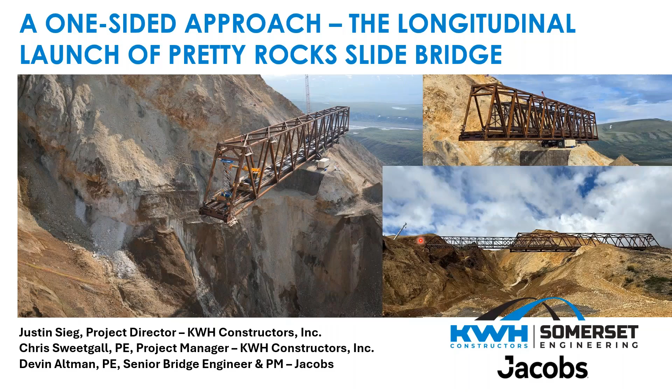What you're seeing right now on the title screen, the far left photo shows the completed permanent bridge in the balanced cantilever state. Notice the large 130 kip crane at the end of the cantilever and the scissor lift. We also built a bridge within a bridge for this project, so you can see the launching nose nested inside the permanent structure. And on the bottom right, you'll see the launching nose extended across the landslide, resting on the receiving tower prior to the combined truss launch.

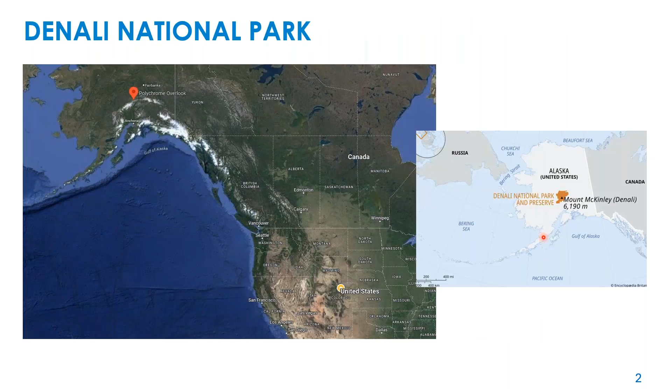For this project, we are in Alaska, the largest state in the United States, and we are in the third largest national park in the United States, Denali National Park, in the south central portion of the state. This is one of the main reasons folks come from near and far to visit the national park.

It's the beautiful scenery, it's the tallest mountain in North America, some beautiful natural wonders. I encourage everyone to join us at the park at some point if you've never been, or if it's been a few years since you've been there.

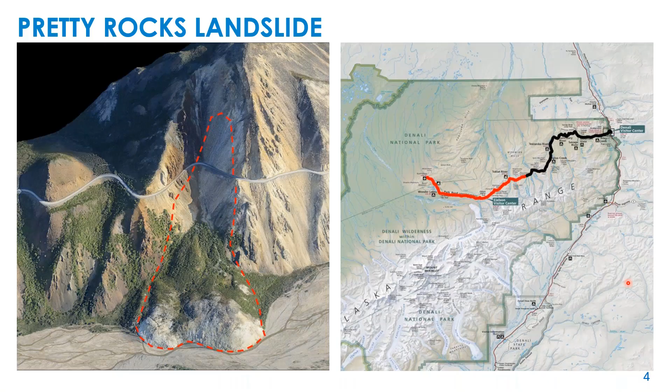The Denali Park Road is the only road in the park, so it is where a lot of the adventures begin and hikes and expeditions go from. So it's a big need to bring it back into access and accessibility to the western part of the park.

As I mentioned, half that park is closed due to the landslide taking out the road, and that has led to the consequence of more than $1 billion per year in revenue loss from the Alaska local economy. That is trickle-down economics, where more than 600,000 tourists each year come to the park from all over the world.

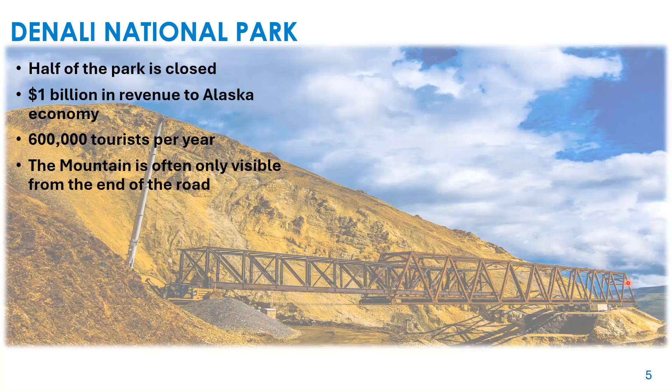The mountain is often only visible from the end of the park road, so this is another need to get it back up and running so people can get there.

Showing a little bit of the history of the slide movement over the years, we have ice-rich soils here with permafrost that some of the increased temperatures have been melting, leading to some instabilities for the landslide movement to progress. Starting in the early 1980s, it only needed a little bit of maintenance here and there every couple of years. By the end of the 1980s, we then progressed into needing annual maintenance to service the road.

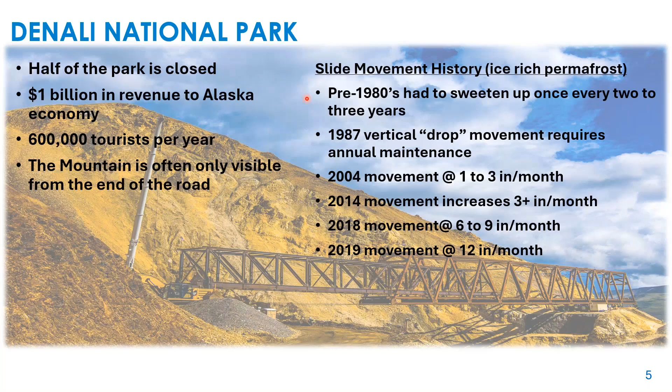In the early 2000s, we're talking about inches per month. As we progress towards the end of the 2010s, we get to feet per month, and finally 5 feet per month, when the Park Road was closed and no longer allowed to be serviced at the end of the 2021 season.

The first construction season was that summer. It is a very shortened construction season with only really 5 months we can count on for construction. So there are 4 seasons planned of work, 3 have been completed, and we'll go into more detail, but the project is scheduled to be completed here at the end of this summer, in 2026.

Due to the site constraints and trying to span the landslide, what we ended up with was a 475 feet steel Warren truss. It helped fit the site really well to span the gap and go over the landslide. It also helped that the park road itself is quite narrow, and we only have an 18-foot wide roadway.

With the 475 feet, we have about 10 panels, each one about 47.5 feet long, which led to easily shippable pieces, nothing longer than 50 feet, so everything can get to the remote site easily. We ended up with a Warren truss after looking at a couple different options, but because we have a lot of different configurations and stress reversals, with different diagonals going into tension or compression, it set up nicely and gave us the right combination of stiffness we were looking for.

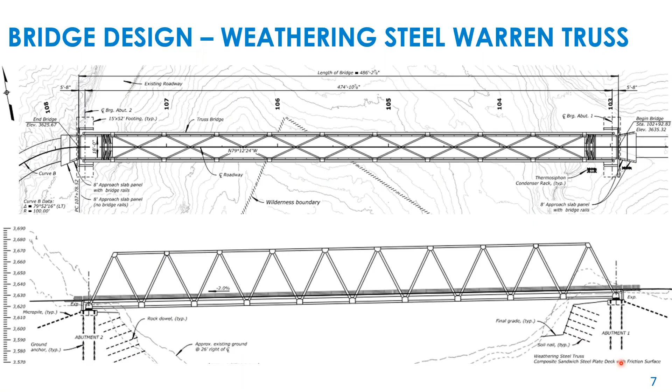We wanted to keep things rather simple, so all of the chord members are box shapes, and the end posts as well. All the diagonals, except for the end posts, are H shapes. The most complicated shape is probably this 5-sided top portal strut. We also had built-up I sections for the floor beams and rolled flange beams for the stringers and top and bottom lateral bracing.

We also have a lightweight sandwich plate system, SPS deck system, which has 2 thin plates of steel and a polyurethane core that helped us save on weight for the structure.

One of the other unique aspects to the construction is the fasteners being used. These are new in the AASHTO LRFD Bridge Design Specifications 10th edition, and they weren't in AASHTO at the time we designed them, but it's the TNA torque and angle Grade 144 fasteners. They're able to be tightened from just one side. This spline is fixed and doesn't come off like a TC twist-off bolt.

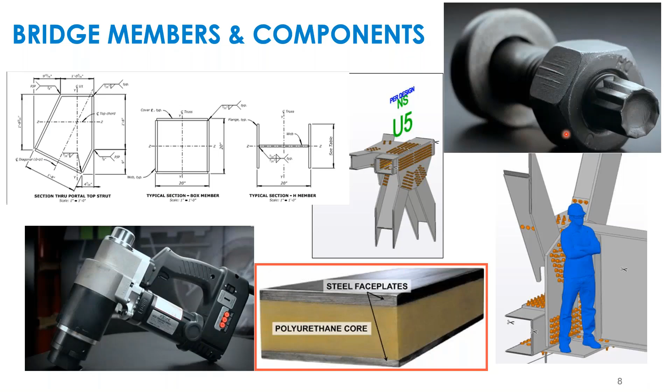This gun has a dual socket. The inner socket grabs the spline, the outer socket grabs the nut, and is able to tighten the bolt from one side. All of the fasteners were exterior facing for constructability.

I mentioned some of the geometry already. The out-to-out width is about almost 26 feet. The client for this project is Western Federal Lands, the Highway Division of FHWA. The owner of the bridge is the National Park Service. Prime consultant was Jacobs, and BGC Engineering was the geotechnical subconsultant for the project.

Over here you can see a typical section. You can see the floor beam, the stringers, the SPS deck, along with the guardrails on the outside and the narrow roadway width. I'll point out, if anyone has an 18-foot roadway in the future, the MBE manual makes you load rate for 2 lanes, but you only design for the bridge design specifications for 1 lane.

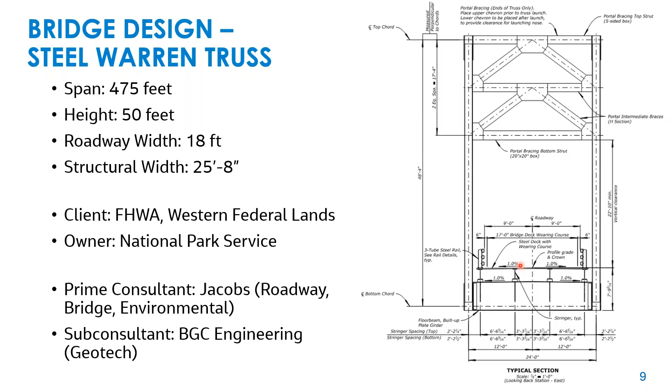For this CMGC delivery method, I really want to commend our client, the U.S. Department of Transportation, for fostering innovation and collaboration very early on in 2023 that allowed KWH, Jacobs, Granite, and FHWA to work together early in the process to design for constructability and erection means and methods, to get going on a BIM for bridges model and get the lead time going for steel to reestablish the road as soon as possible.

And with that, I'll go ahead and pass it over to Justin.

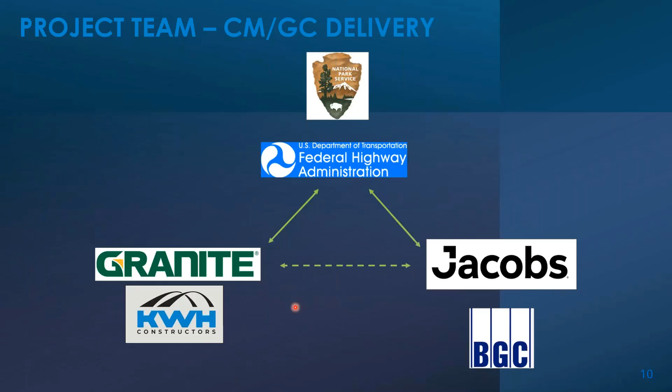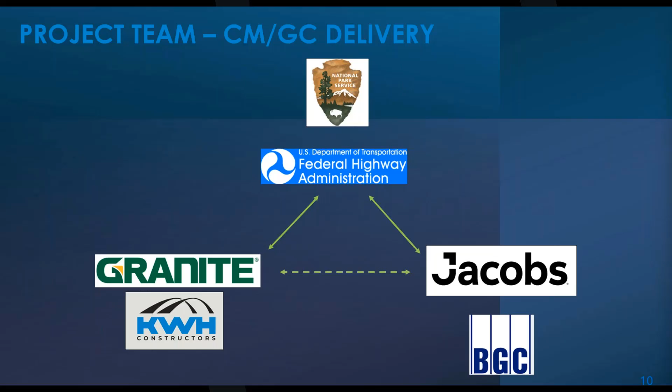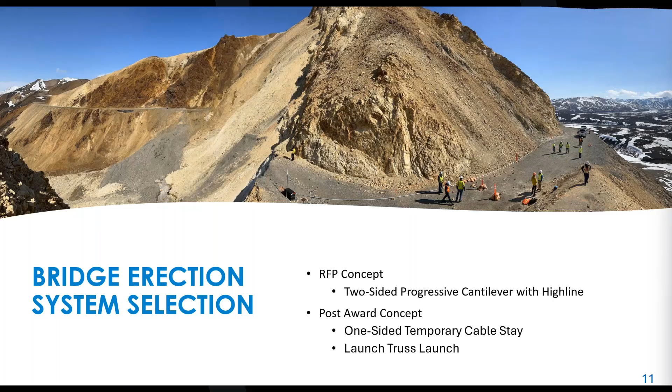As Devin said, the CMGC process was utilized, and we were able to be brought on board early, KWH constructors along with Somerset Engineering, during the pre-construction phase. The first task we had was to select the bridge erection system. It needed to be selected first because this complex erection would control the final design of the permanent structure as well. At RFP time, there was a 2-sided progressive cantilever approach with highline to transport material across the slide. Post-award, 2 other options were considered: a 1-sided temporary cable stay and a launch truss launch methodology.

The RFP concept, progressive cantilever from each side utilizing a highline, had some challenges. There was a lack of geotechnical information at highline stay locations and stay foundation locations. When we did receive additional geotechnical information, the data showed unfavorable conditions behind the west abutment, showing ice-rich colluvium behind that abutment, which was unsuitable.

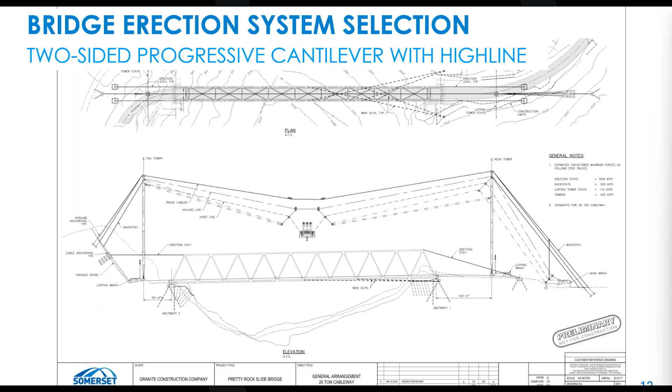There was an issue with the feasibility of the wind guys due to the magnitude of the wind in securing them, and it was difficult to mobilize a large enough crane to erect the highline towers.

The second concept of the one-sided temporary cable stay approach was good in that we're directly erecting the bridge like the previous, and it did not rely on temporary foundations on the west side. It still had the issue of the feasibility of wind guys due to the magnitude of the wind, and the duration of exposure to wind was high throughout the erection process.

The exposure, or the area of the structure, got worse and the magnitudes of the loads got worse. And there's unpredictable wind conditions at this site.

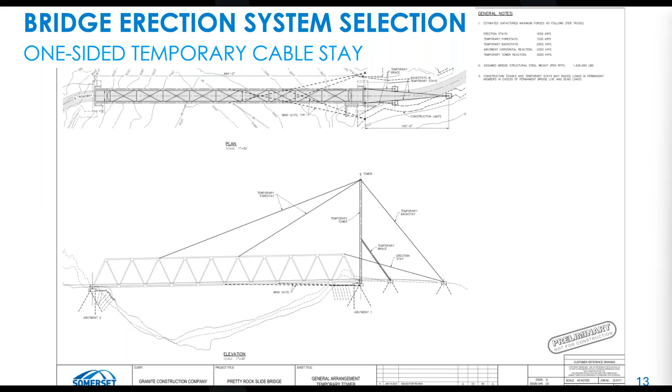The last considered was the bridge erection system of the launch truss launch. This did not rely on temporary foundations on the west side either. It had the best ability to resist wind loads due to the bridge being erected at the central line of abutment 1 and utilizing 3 bays of the bridge to resist that wind load.

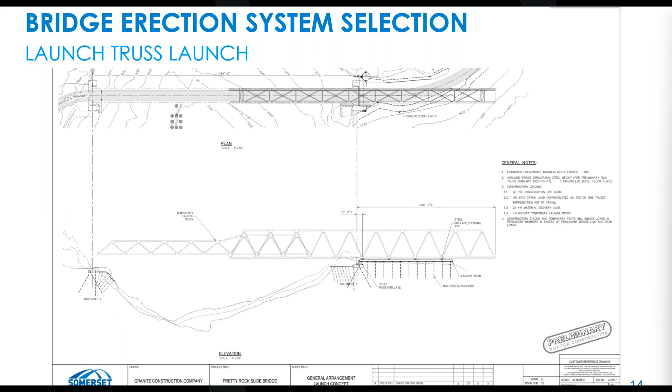We could build the entire truss and build the launch truss inside the truss, and choose when to perform that launch truss launch and each of the combined truss launch activities, where we had stopping points to wait for a weather window. Ultimately, the launch truss launch methodology was selected as the wind exposure periods were less, and it didn't rely on temporary foundations on the west side or access across the unpredictable landslide.

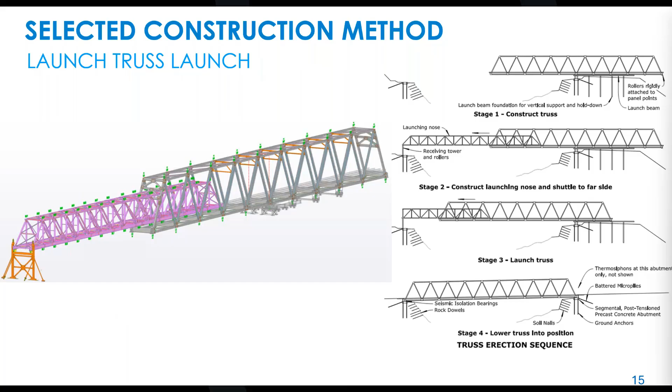When the bridge erection system was selected, the next step was to progress to the design of the permanent structure and the bridge erection system. The CMGC contracting method allowed for constructability during the design phase of the permanent structure because of the ability to perform a parallel design of the bridge erection system and the permanent bridge.

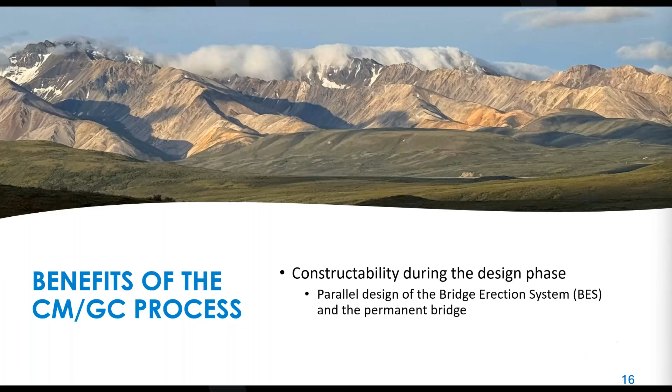The erection engineer was able to work closely with the bridge engineer to consider all load cases during construction, many of which are controlling loads due to the complex erection method required. We knew the permanent structure would withstand the forces imposed during erection because of this intimate coordination between the erection engineer and the design engineer.

Once we were able to develop those loads and start to have confidence in the member sections of the permanent bridge, we introduced the IDD, or Integrated Design and Detailing process, for the main bridge. We were able to work collaboratively and implement this process. We brought on DBM Vircon as the detailer to begin building a model that would ultimately be used for fabricating the permanent bridge.

That's a large difference and is not done very often at this stage, but we were actually creating the model with enough accuracy to fabricate the bridge from. We started the process by creating a 3D wireframe to agree on the geometry. We then infilled main member cross sections. Once that was decided by the design team, we were then able to produce an advanced bill of materials, or ABM, for solicitation of the main member plate.

We were able to award the mill order to a fabricator, and that duration of the mill order, approximately 6 months, was able to happen at the same time that we were completing the connection design and the final design of the bridge. It also allows for accelerated connection design.

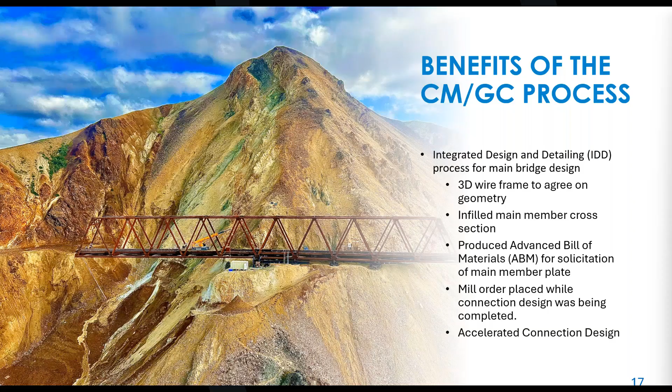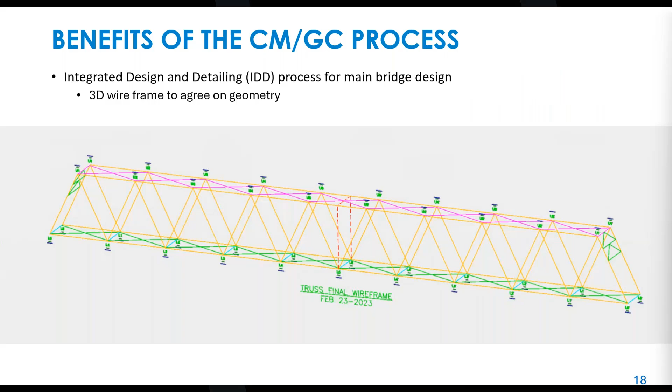So I'll show you each of these steps. The 3D wireframe is what I'm showing here. This is the first step: create a general geometry and also camber. We were able to have this model approved as the basis.

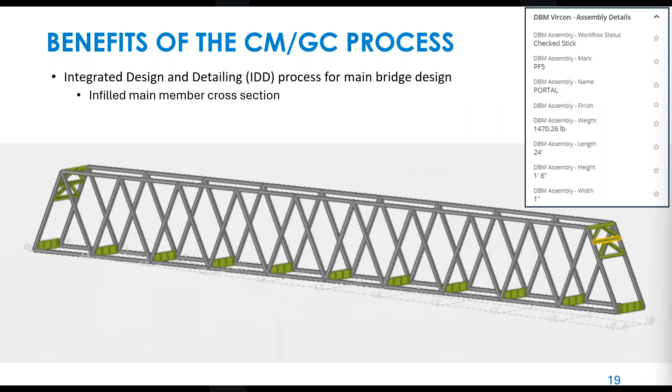Once we had that solidified and approved, we were able to produce this advanced bill of materials and make it easy to get accurate pricing from a fabricator, and then move into the award and procurement of this material. I just wanted to note that some people may think it's odd to have the fabricator on at this time.

This was a fast track project with a goal to open the park road as soon as possible.

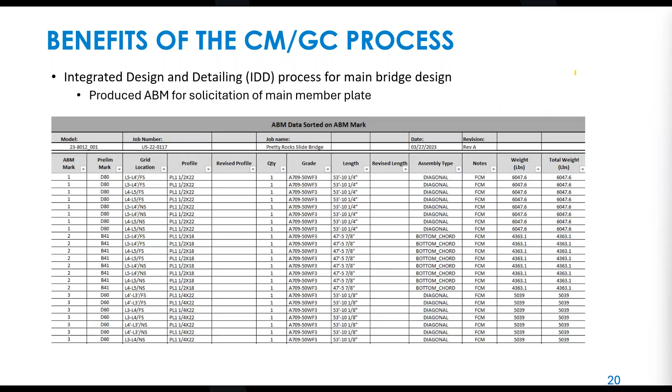It's interesting that the fabricator that procured the primary plate did not end up being the fabricator that fabricated the bridge. So you're not necessarily stuck at this phase with an initial fabricator.

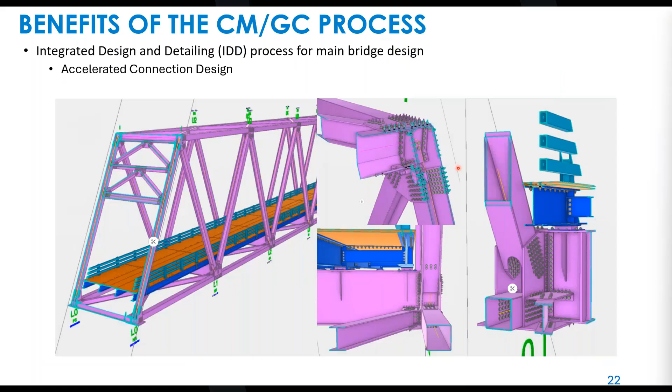Another benefit of the CMGC process was the ability to have the temporary foundations designer on board during the pre-construction phase. This is a very unique geological site that varies wildly. We had very little geotechnical information in the area where we needed temporary foundations. We completed the preliminary design during pre-construction.

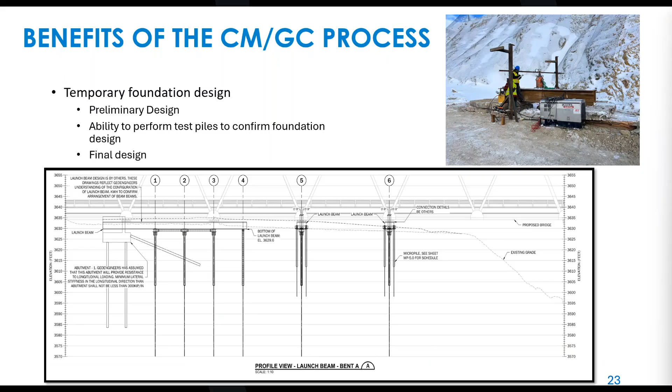These are all examples of benefits of the CMGC process, but it's not meant to be an all-encompassing list, as there are many more benefits. These were just focused on the design phase of the project.

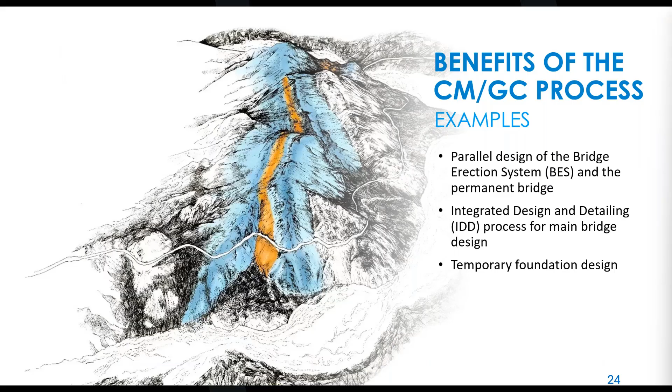Now that we have the background of the project and have gone through the design phase of the permanent bridge, Chris will begin to look at the installation sequence and the details of the design of the bridge erection system.

Thanks, Justin. So the first step in the installation process was to install the foundations in the launch bed, as Justin described, and then to assemble the main truss on top of them.

The first four bays of the truss were erected using a land-based crawler crane, left over winter between the first and second construction seasons. At the start of the second season, a small telescopic crawler crane was placed inside the truss and used to erect the remainder of the truss in a balanced cantilever progression, as seen here.

The next step was to construct the launch truss within the main truss. The launch truss was progressively assembled on rollers one bay at a time, and each bay was shuttled forward until the truss was fully installed within the main truss.

The launch truss was then launched to the receiving tower. Using the jacks on the receiving tower, the tip of the launch truss was raised about 7 feet to counteract rotation and deflection, providing level support for the combined launch.

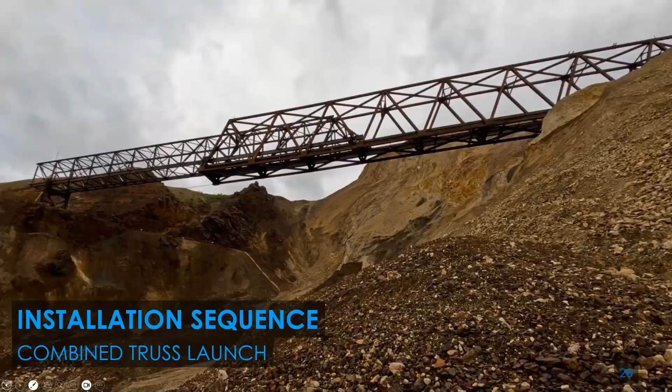The combined truss was then pulled across the slide using strand jacks located on the receiving tower. Once the combined truss was across the slide, the jacks in the receiving tower were used to lower the west end of the bridge to its final elevation.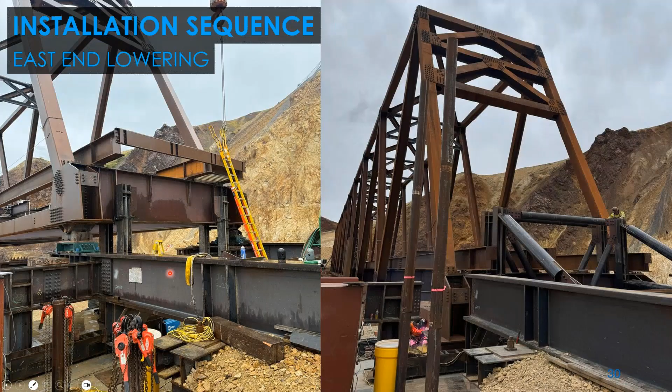Next, on the east end of the bridge, a jacking frame was constructed within the launch bed and used to lower that end to its final elevation. The final step was installing the SPS decking plates and bolting them to the stringers.

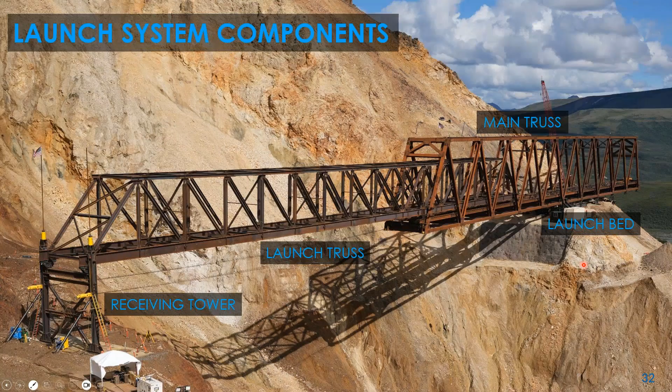So a quick recap of the launch system components: we have the launch bed, the main truss, the launch truss, and the receiving tower. The launch bed was used to support the main truss during erection, including over the winter, and then again during the cantilever phase of the launch truss launch.

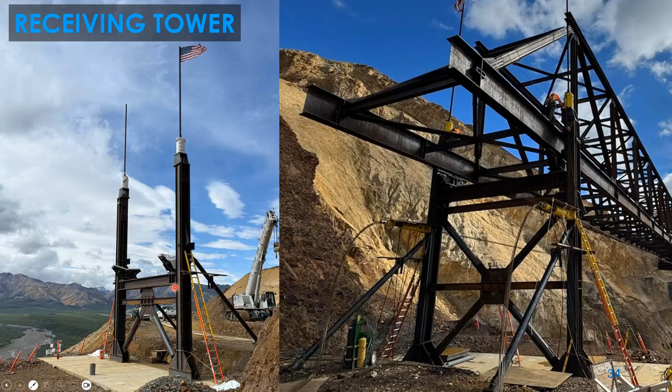It then provided a launch track for the combined truss during the combined launch, and was built out of W36 by 529 launch beams, as well as C15 channel tie-downs and HP16 by 121 outriggers to support the truss under winter loading conditions. The receiving tower was intended to provide variable elevation support for the launch truss and the combined truss.

It consisted of HP 18 by 204 columns reinforced with double C15 by 50 channels. These were the largest sections available to us at the time. Due to time constraints, there wasn't time to fabricate a custom section. We had to get the pieces across the slide before access was lost.

At the top, we had 400-ton center hole jacks with 3-inch diameter bar, which was the largest high-strength bar commercially available. We had double 200-ton rollers to support the launch nose and 70-ton strand jacks to pull the combined truss across. The main truss was designed by Jacobs Engineering, and it was 475 feet long, by about 25 feet wide and 50 feet tall, 24 feet wide.

It weighed 1.6 million pounds, and was split into 10 bays. It consisted of built-up box and H sections, rolled W shapes, and built-up crowned floor beams. There were 24,000 1-inch diameter TNA bolts in the structure.

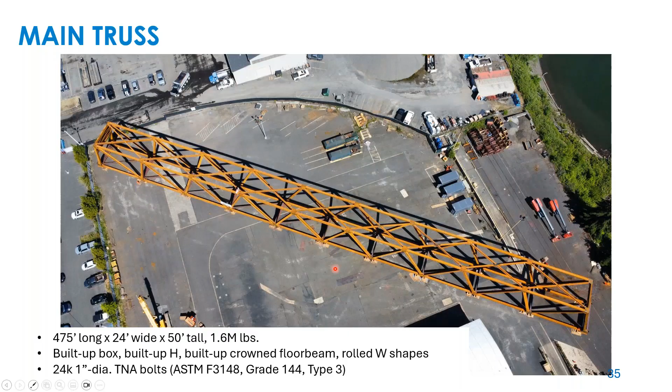The launch truss had to span the 237-foot gap between the main truss and the receiving tower, and it was 392 feet long, 20 feet wide, 25 feet tall, and weighed about 636,000 pounds.

We used almost all types of steel generally available to construct the launch truss. There was 100 KSI connection plate, 70 KSI plate, 50 KSI plate, plus rolled channels, I-beams, and angles. It used 9.3 thousand 1-inch diameter bolts.

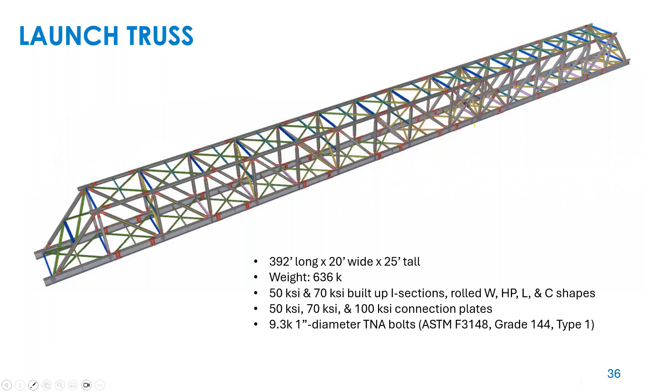Now Justin's going to talk through the interfaces between the various launch system components. The first interface to look at is between the launch bed and the main truss. The main truss needs to be statically supported during main truss erection and the launch of the launch truss, but during the combined truss launch, it needs to allow movement.

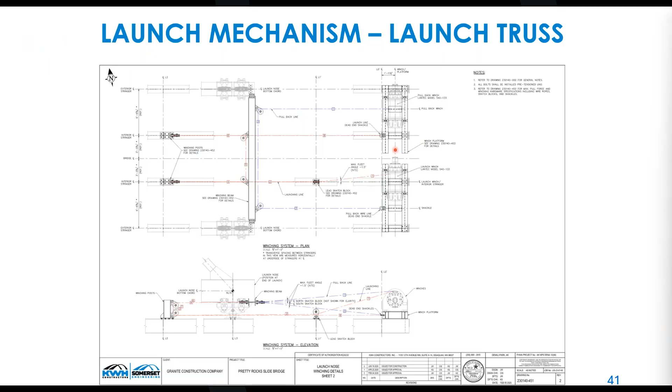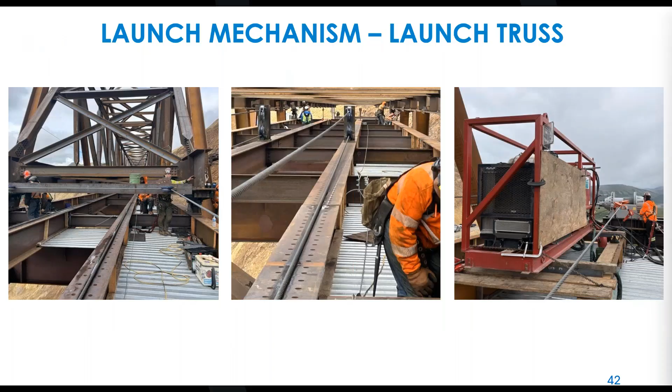It went back, connected to that winching beam I showed at the end of the launch truss, through here, all the way back to the winching post, down, and back to the structure. This is what it looks like installed. This was the hydraulic winch, which gave us a lot of control during the launch. It went out of here, down to the winching post, back up into the winching beam, over, and then dead-ending back at the frame. The last mechanism for movement was for the combined truss launch.

We mounted strand jacks, provided by Enerpac, to the west face of the receiving tower columns. We ran strand from there to the L0 node of the permanent structure. This method was selected because it provided controlled movements and directed the bridge to where it was supposed to go, lessening the guiding forces required.

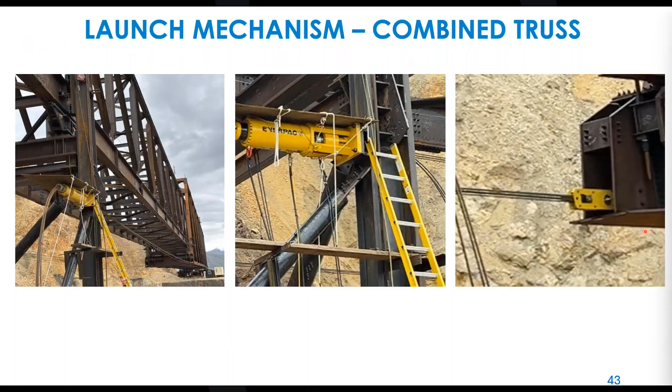Thanks, Justin. So this being an FHWA bridge project, we used AASHTO codes for the design. The main reference used was the LRFD 9th edition, which was in effect at the start of the project. The 10th edition was released toward the end of the design phase, and there were certain specific refinements used in our design in a limited capacity.

Since the bridge erection system was mostly temporary components, the guide design specs for bridge temporary works were applicable, and it was also necessary for us to reference ASCE 7 for load development.

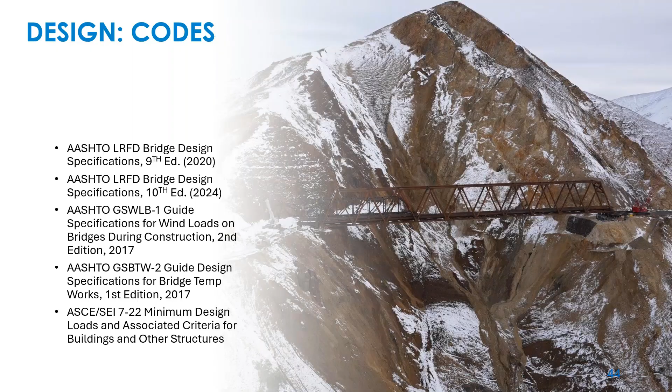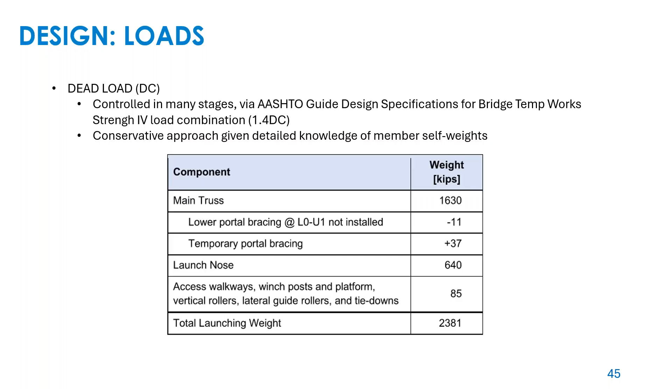And I'll go briefly through some of the loads taken into account in the design. Dead load controlled in many stages, especially for low wind stages, and we used a load factor of 1.4 throughout, which is arguably conservative given the level of certainty of the member self-weights.

Wind loads were based on a climatology study and wind tunnel testing done by RWDI. You can see here their scale model in the wind tunnel. Wind was key for many of the launch stages, so we monitored wind speeds throughout construction using weather stations with satellite uplinks. We planned our launch operations based on customized local forecasting given to us by RWDI.

The wind speeds we considered were 110 miles an hour for components left over the winter, 85 miles an hour for most components when not under active launch conditions, and 30 miles per hour for active launch stages.

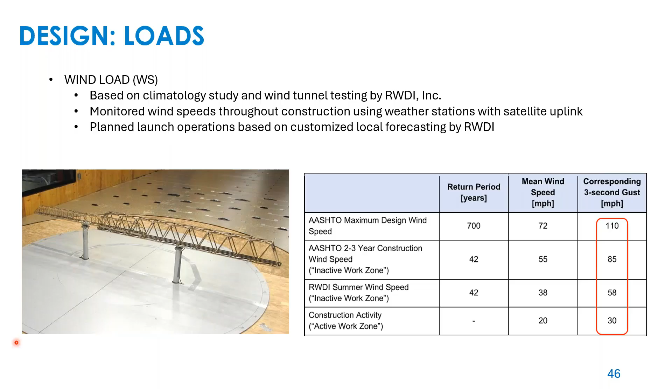The live loads we considered were mainly the crane, but we also had scissor lifts and personnel and construction materials on the deck. As you can see here, there were 19 different crane positions modeled in our design.

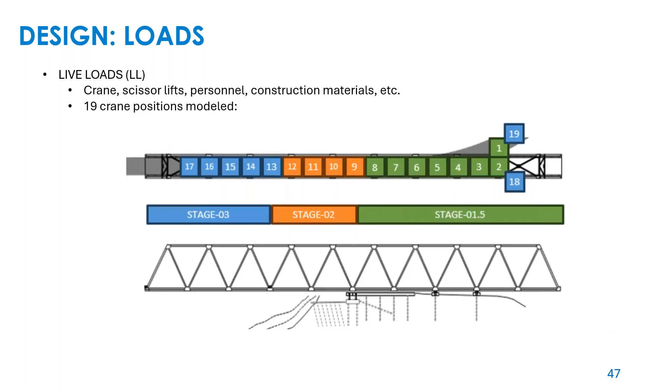This being Alaska, it was necessary to account for snow and ice, especially during the winter months, and the forces were not insignificant. Ice load ended up being about 20% of the dead load, snow about 30% of the dead load, and wind on the ice was about 30% of the wind load.

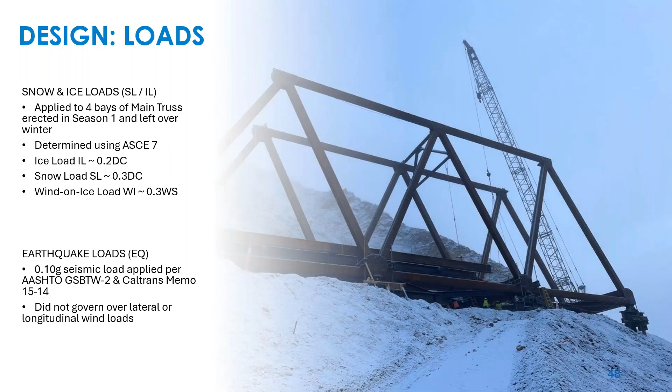We prepared a global model using CSiBridge and used it for the entirety of the design. The erection of the main truss was modeled as a piece-by-piece staged installation, and the launch was modeled as 12 full launch stages, which were split into 73 substages.

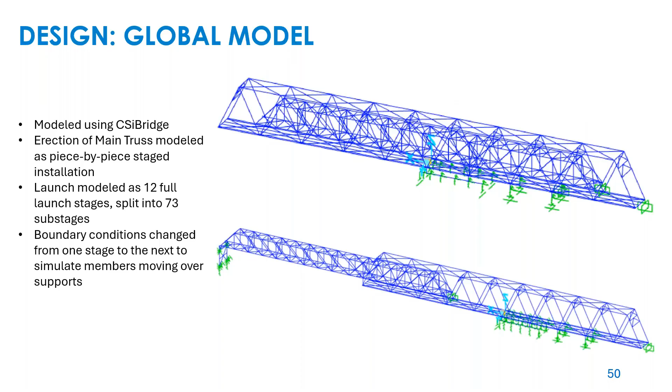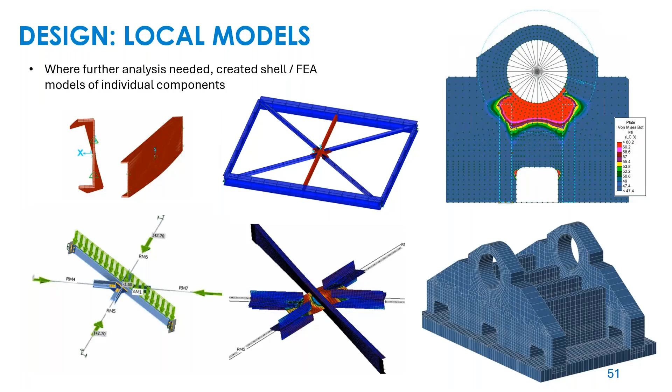In the launch model, the boundary conditions changed from one stage to the next to simulate members moving over supports. While that gave us the bulk of our design forces, it was necessary to develop local models for specific components, such as roller frames and rockers, where bridge codes aren't really rigorous.

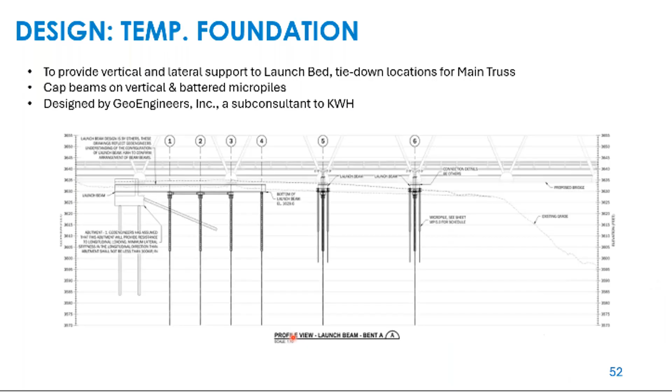The temporary foundations were designed by Geoengineers Incorporated, a subconsultant to KWH, and they were intended to provide vertical and lateral support to the launch bed and to give tie-down locations for the main truss. They used cap beams on vertical and battered micropiles.

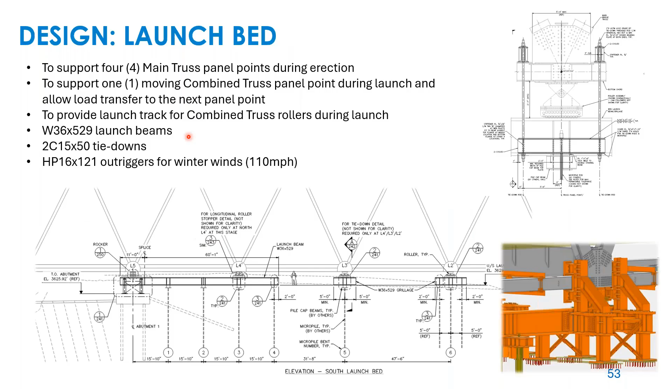The launch bed was intended to support 4 main truss panel points during erection and to support 1 moving combined truss panel point during launch, and to allow for load transfer from that panel point to the next panel point. It provided a launch track throughout that launch for the rollers to roll on. As mentioned earlier, we used W36 by 529 launch beams, which were basically the largest section available to us at the time, as well as a number of other components.

The receiving tower was intended to support the west end of the launch truss and the combined truss at varying elevations. It had to raise the tip of the launch truss about 7 feet for the combined launch, and then lower the truss about 14 feet to its final elevation.

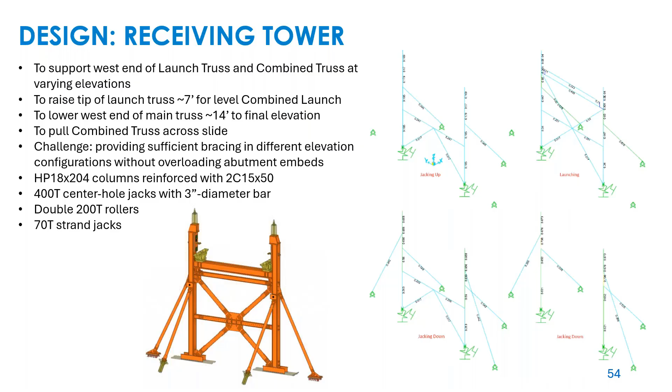It also had to support the strand jacks and their loads for pulling the combined truss across the slide. The challenge in designing the receiving tower was providing sufficient bracing in the various different elevation configurations without overloading the abutment embeds.

The launch truss was intended to extend the main truss for the combined launch. It had to be quickly dismantled at the end of each stage of the combined launch because there's a rock face on the opposite side of the receiving tower. So with every 1 bay of the main truss that was launched, 2 bays of the launch truss had to be dismantled.

It was subject to significant load reversals because it went from a cantilever support to a simply supported condition. And the bottom chord also had to resist combined compression and flexure while rolling over the receiving tower. This is where the 10th edition of the AASHTO was helpful in the analysis.

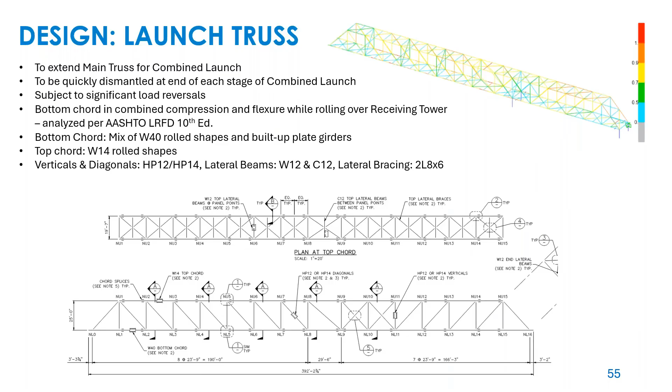That bottom chord was a mix of W40 rolled shapes and built-up plate girders. The top chord was W14s, and verticals and diagonals were a mix of various components.

The main truss was analyzed throughout the entirety of the erection process. First we built a piece-by-piece model simulating the actual erection of the truss itself, and then the staged model represented all stages of the launch. We checked all main truss members and connections at every stage, and there was no allowance for temporary overstress.

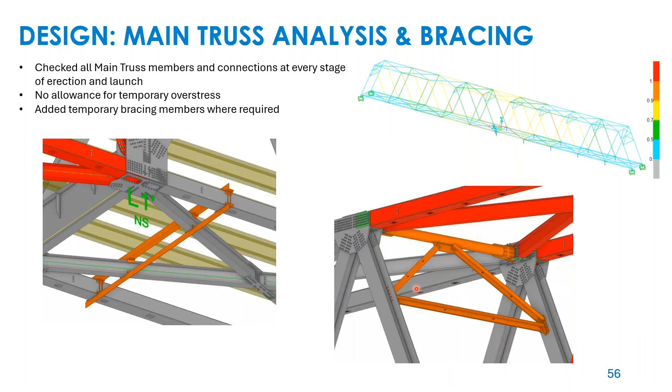In some locations, it was necessary to add temporary bracing members, as can be seen here: temporary portal bracing and temporary bracing of the permanent lateral bracing.

The east end lowering frame had to be constructed within the launch bed and provide vertical, lateral, and longitudinal support to the main truss throughout the lowering operation. We had to build it in the launch bed while removing the launch bed, so it posed significant challenges in its design and in its construction. But ultimately, it allowed us to lower the bridge about 9 feet in 9-inch cycles.

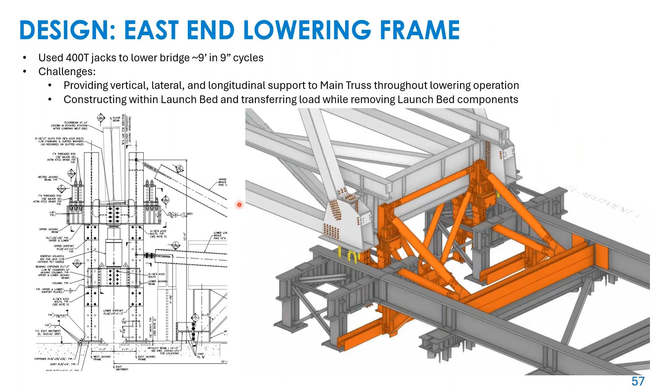I'll speak about some of the design challenges we faced. The tie downs between the launch truss and the main truss were certainly challenging. At L0, this tie down was a critical connection. It transferred all of the downward load during the cantilever launch truss launch, and then all the uplift load during the combined launch.

There was a need for redundancy without much available space or weight. It used 8 2¼-inch high strength bars connected to beams that were welded to the floor beam via 3-inch thick plates and stabilized using other plates bolted to existing stiffeners. There were very tight clearances there, so we had to specify the direction of installation for the permanent bolts so that there wouldn't be clashes.

At the L3 tie down, this is another critical connection. That had to support the downward force during the launch of the launch truss, which then became uplift force at the end of that launch, and then went back to being downward force during the combined launch.

Same as at L0, there's a need for redundancy without taking up much space or weight. We also needed to create an uplift connection between the stringers and the main truss structure because there was none in the permanent design. There's also a need for a longitudinal connection that would not be affected by all those load reversals and would not create a large force couple with the lateral wind load applied to the end of the launch truss.

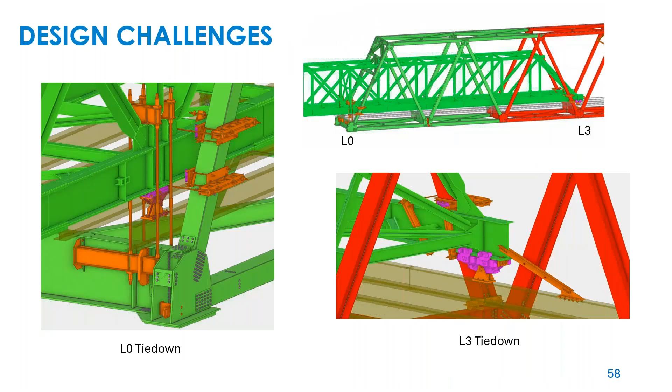So now Justin's going to talk through a few of the other design challenges that we faced. One major remaining issue is the interdependence of the main truss and the launch truss. They're integrated together. We completed the main truss design. It was 5% heavier than expected, but we didn't have time to optimize the main truss.

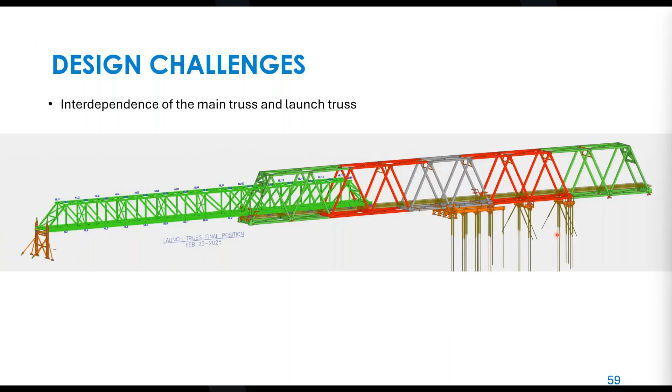It needed to go into fabrication so we could meet our season 2 goals. To optimize the launch, we reduced the launch truss's weight while maintaining its strength by using 100 KSI splice plates for anything that didn't need to be welded, 70 KSI knife plates, cutting out unused steel in the knife plates, and trimming the free leg of angle bracing to the extent possible.

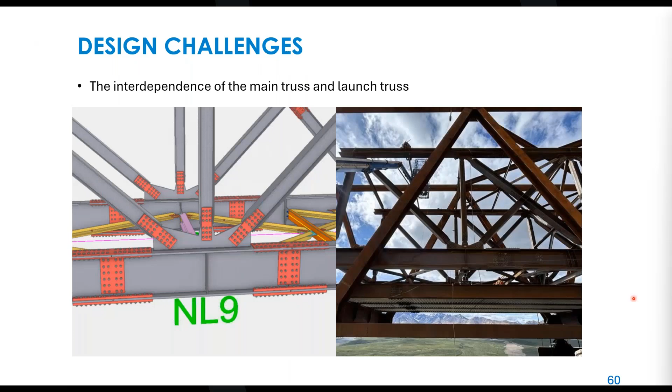This is a look at the knife plates and connection plates where we have cutouts. These were made thinner by using higher grade material, and the red pieces are the splice plates that were made out of 100 KSI steel. That's what it looked like in the field.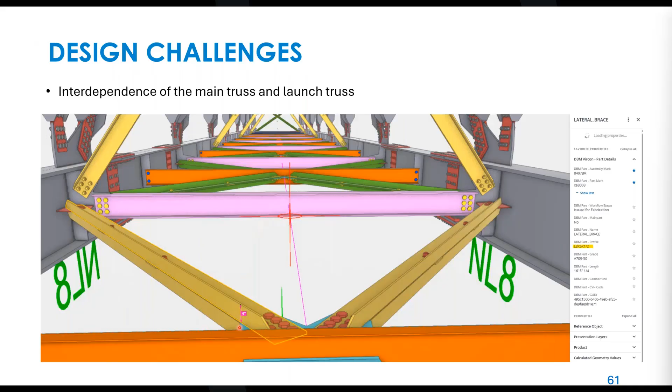This is an example. We had a lot of this double angle bracing. If you look in the model here, it was a standard shape, 8 by 6 by half inch. We trimmed the free angle leg to 4 inches because that's all that was required.

The last design challenge we'll speak of is just the temporary support of the main truss in the launch bed in its load path. We're supporting the main truss at the center, not at the ends of the bridge where it's meant to take a load like this. So there's a few things to consider.

This is a free body diagram of the first issue, which was pre-tensioning the tie-down rods and ensuring that the launch bed structure beneath and the permanent structure were not damaged. Secondly, was the actual load path.

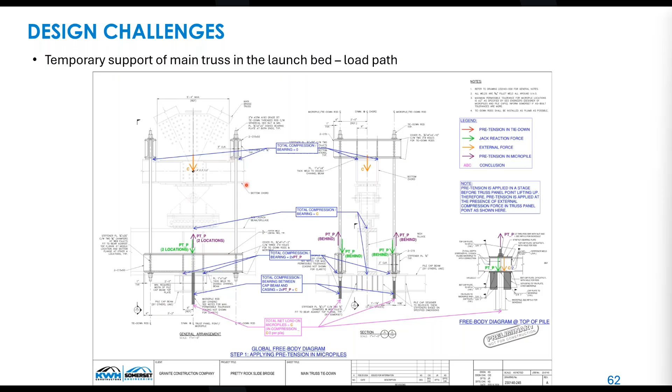This is what a typical location looked like in the field. If you look at this bottom photo, there are these yellow highlighted load bars. We directly transferred the load through the vertical gusset plates. We did not develop this detail until after the permanent truss was designed. It would have been nice to modify the weld detail on the box members to transfer through there, but this may have been better anyway because it's a direct load path.

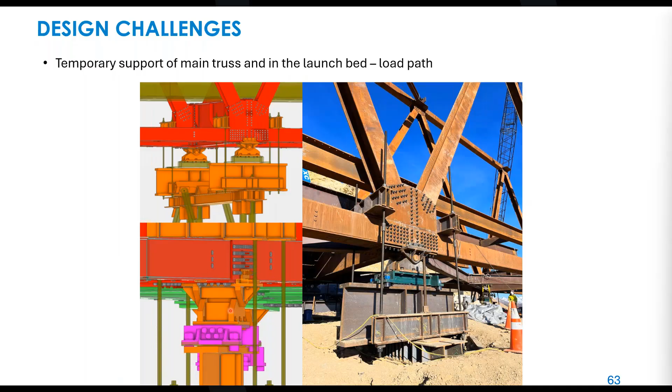Those were some of the design challenges. We went through everything about the project, and now we wanted to show a construction overview by showing a time-lapse photo or time-lapse video. Hopefully it works out, but it looks like things are lagging today.

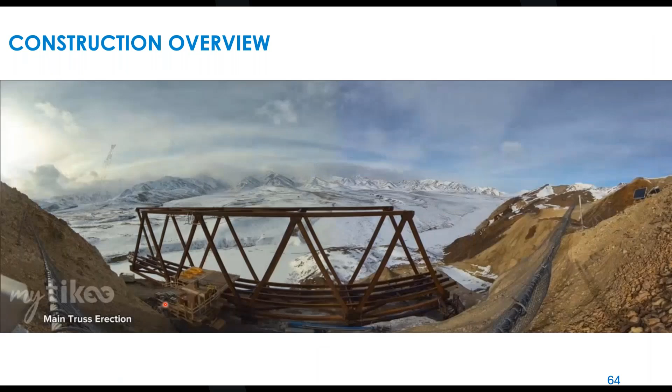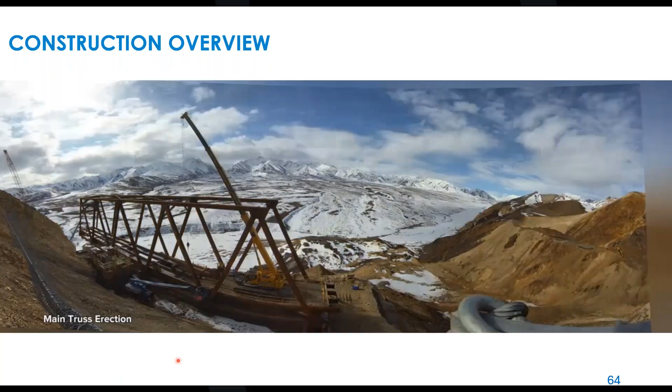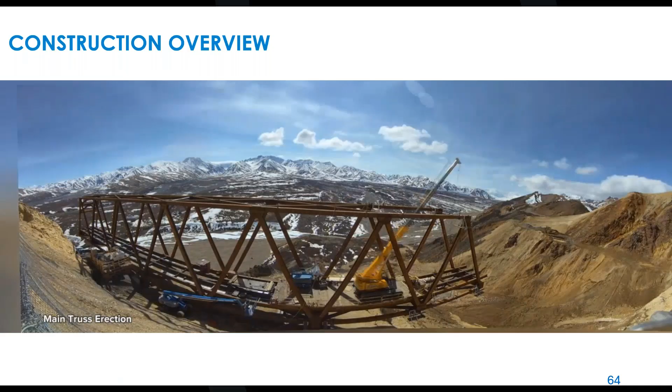Paul, we can go ahead and start the Q&A with the time lapse running in the background. Okay, we'll go ahead and ask some questions. There were a couple of questions about the landslide, and you showed how it was progressing over time.

They were curious about how did you choose the location of the abutments? The picture shows them pretty close to the slide zone. So we wanted to maintain the alignment of the road. We looked at a couple alternatives, going above the Alaska Range and going down below as well, but this made the most sense. We actually extended the length and pushed it another 50 feet from when we originally wanted it, because we wanted to stay away from the landslide and some of that susceptibility. So it was really the longest simple span we could go with while maintaining that roadway alignment.

Is ongoing monitoring of the slope going on now? Will it continue? Yes, BGC Engineering has inclinometers and LiDAR change detection. We've actually been able to monitor the movement of the soils from where they came from to where they go, and we've been looking at that pretty regularly using Cambio.

Okay, then we'll go on into design now and ask some questions. Did the bridge geometry or the truss configuration evolve as constructability constraints arose, or was it pretty much always a Warren truss?

Since KWH was on board, the Warren truss was in the solicitation package for the CMGC contract during the pre-construction phase. I know Jacobs went through a feasibility study of various different types of bridges, but I think it's been a Warren truss since a truss bridge was selected prior to the award of the CMGC contract.

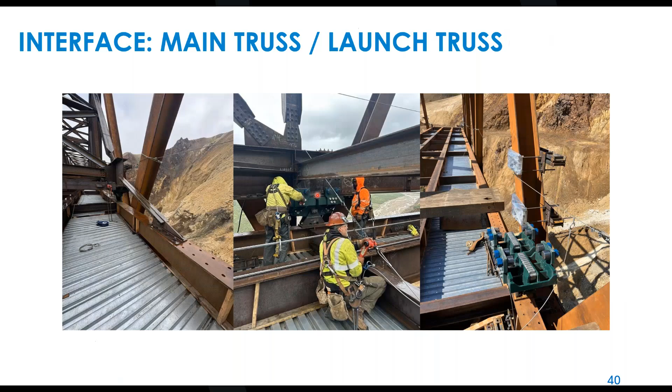Going back to the erection sequence question, was there uplift during the erection at any stage? Yes, there was uplift. I can probably go back. Yeah, so the uplift roller here, this was at the end of the launch truss. There was more of the launch truss outside of the main truss than in the main truss. So at a certain point during the launch, the truss itself was uplifting here, and we resisted it with this.

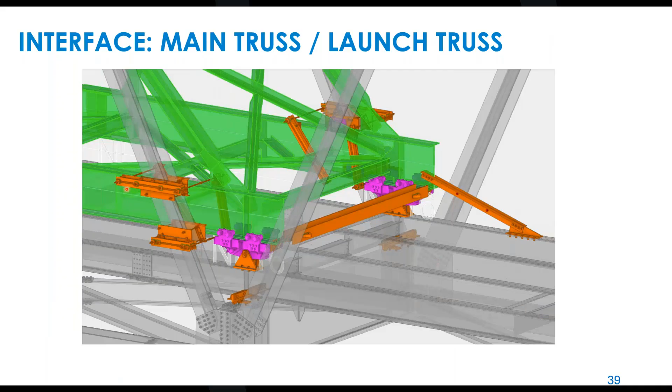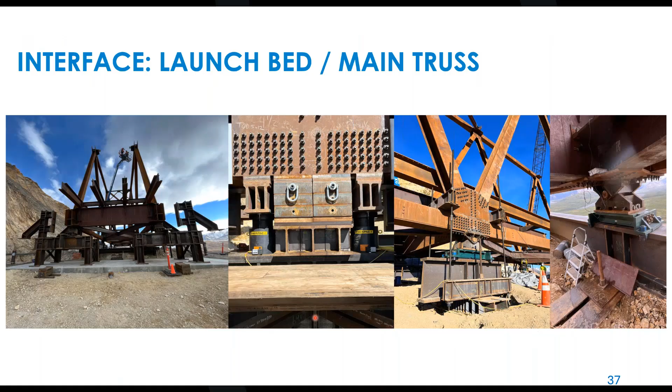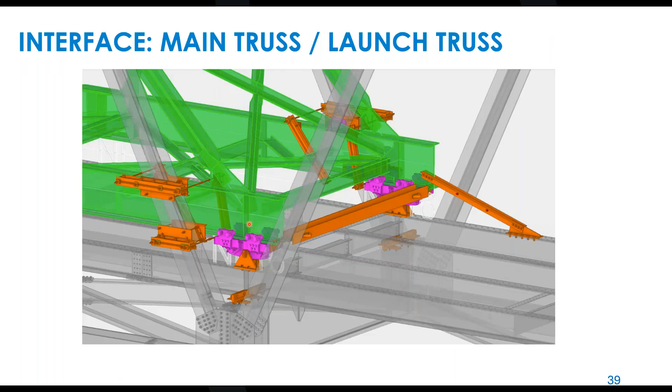So last question goes back to the uplift, specifically on the bearings. It looks like the bearings for the launch truss were subject to uplift loads during erection. What is the special design for the bearings to resist uplift while keeping lateral stability and movability?

Yeah, so this picture I have up here is a vertical support bearing point, which we have to accommodate for uplift. These are roller cams here, right? We had a wider flange - you can see that this bottom flange goes past the stiffener. So when it transitions to uplift, these cams engage, but they're sealed bearings, so the structure can still be advanced with the winch. We have separate lateral guide rollers here and here to allow independence between those two systems. You could have tried to incorporate a lateral guide roller into these as well, but it wouldn't have worked very well, so we always separate the lateral guide rollers from those. But in the case of the combined truss launch, we had to use these cam followers as lateral guide rollers. Again, they're a sealed bearing with frictionless rotation, so that's how we resisted the lateral load but allowed for movement. I think that answers the question.